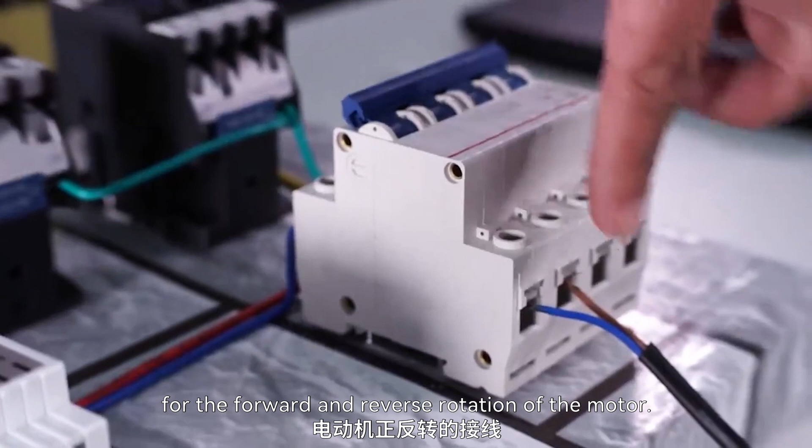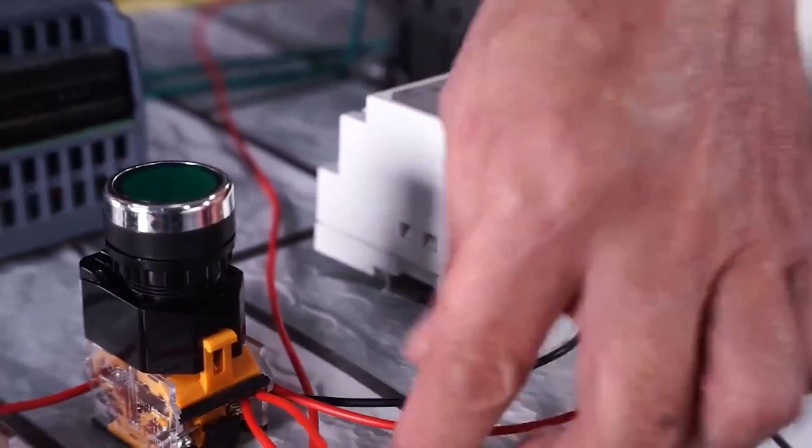Let's now examine the wiring for the forward and reverse rotation of the motor. We have a 220 volts power supply that outputs 24 volts positive and negative power sources. We start by connecting the positive power supply to the PLC's L+ terminal and the negative to the PLC's M terminal.

Then, we connect the positive and negative power supplies to the PLC's 4L+ and 4M terminals to serve as the load power supply.

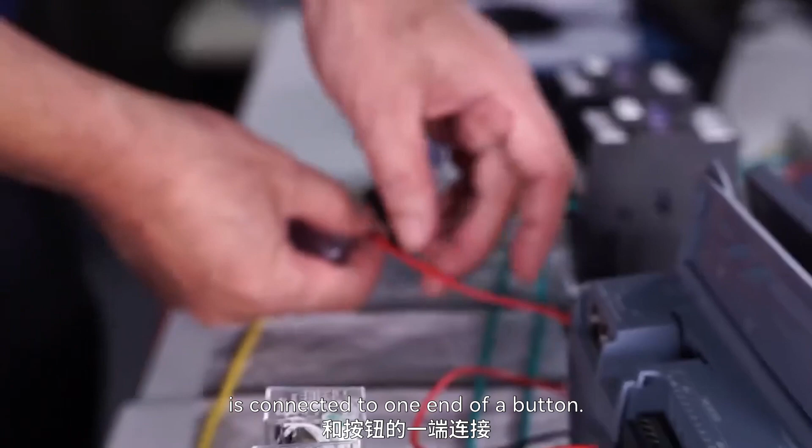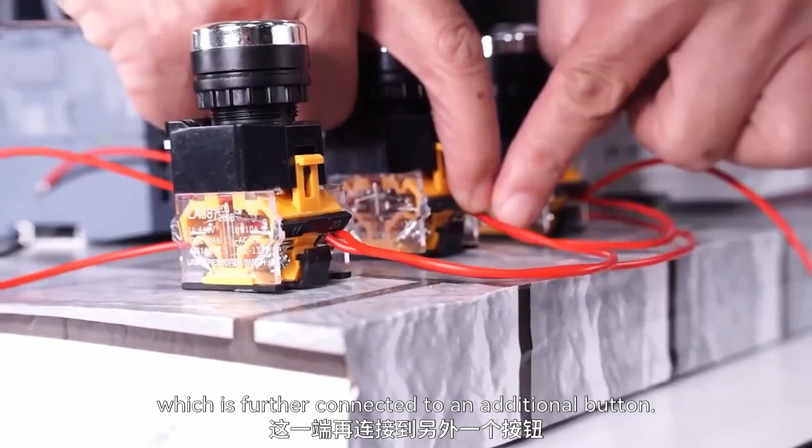One end of the thermal relay's contact is connected to one end of a button. The button is connected to another button, which is further connected to an additional button. The common terminals of these three buttons are connected to the L+ terminal of the PLC.

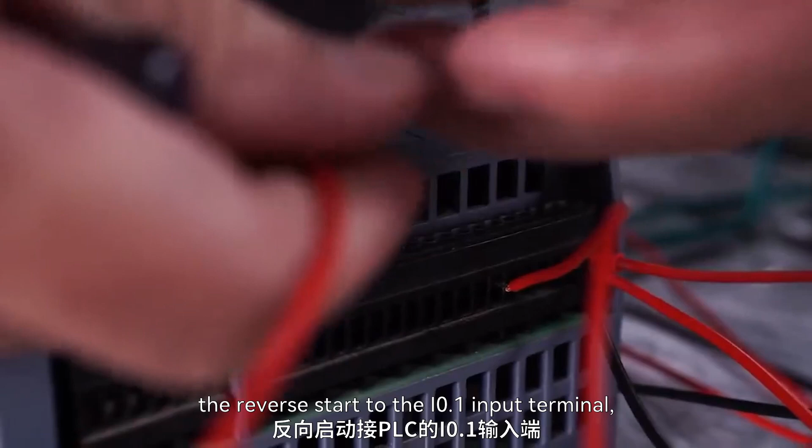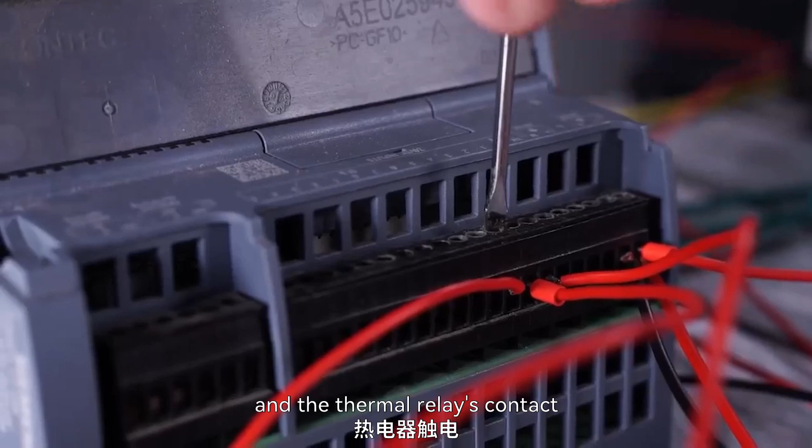The first button, for forward start, is connected to the I0.0 input terminal of the PLC. The reverse start to the I0.1 input terminal. The stop button to the I0.2 input terminal. And the thermal relay's contact to the I0.3 input terminal.

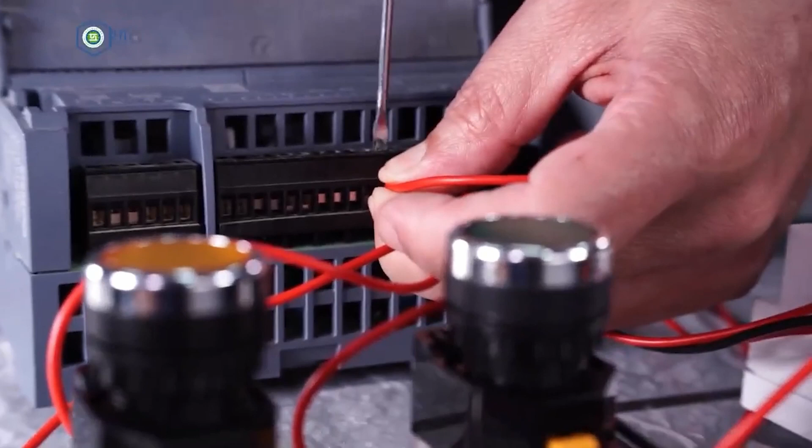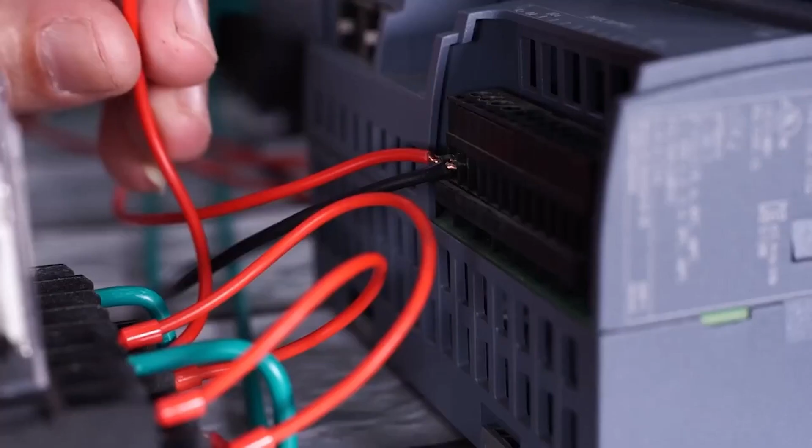The common terminal 1M of the PLC's input is then connected to the M terminal of the power supply to complete the input signal circuit. The PLC's output terminal Q0.0 is connected to the 13th terminal of the contactor KA1, and the PLC's Q0.1 output terminal is connected to the 13th terminal of KA2.

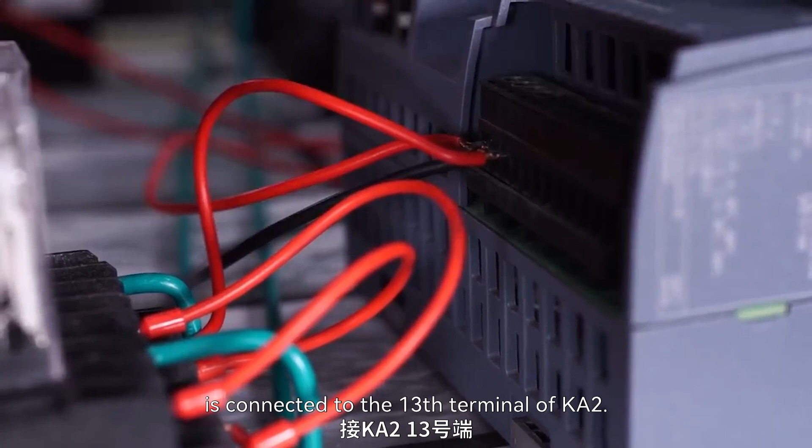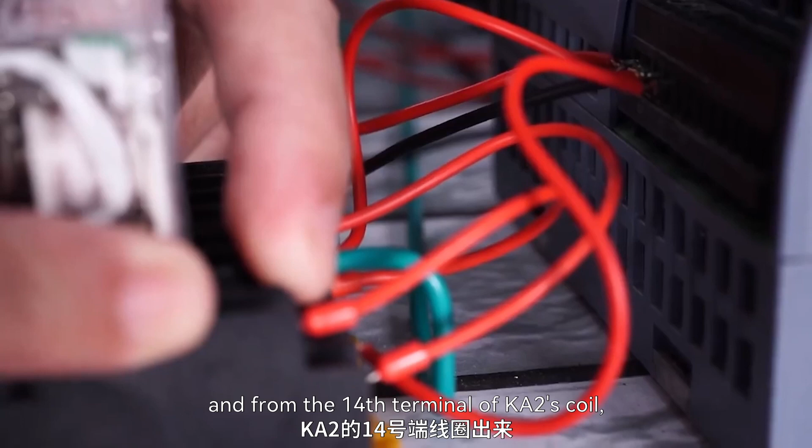From the 14th terminal of KA1's coil, it connects to the normally closed contact of KA2, and from the 14th terminal of KA2's coil, it connects to the normally closed contact of KA1. The normally closed contacts of KA1 and KA2 are linked together and return to the negative power supply 4N.

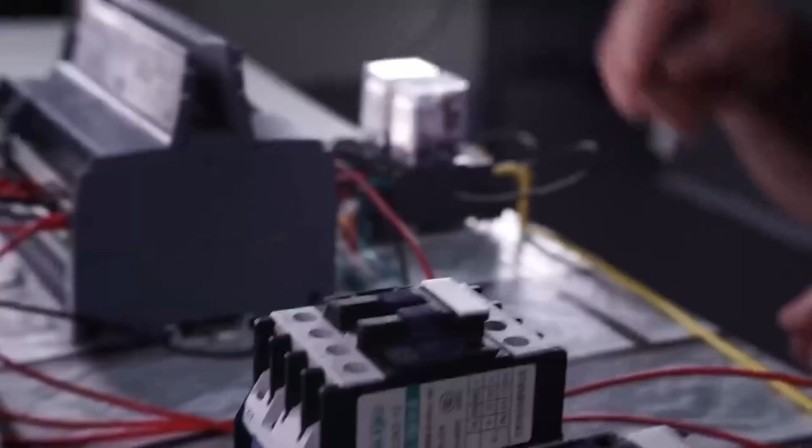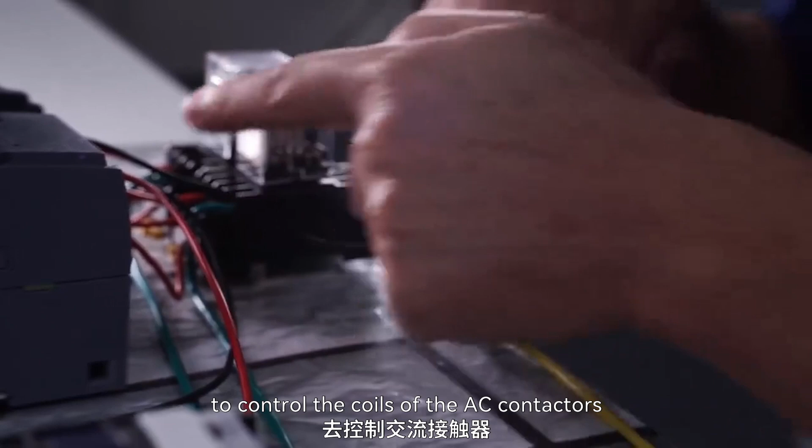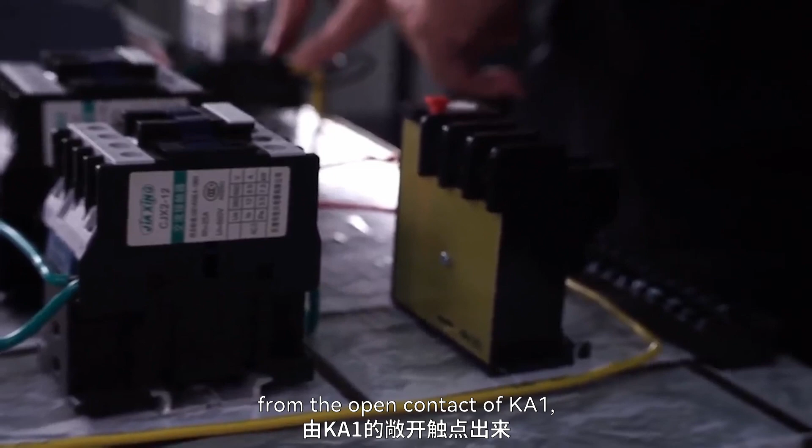Since the controlled DC devices KA1 and KA2 cannot directly control the motor, we use the open contacts of KA1 and KA2 to control the coils of the AC contactors KM1 and KM2. The 380V power supply comes to our two linked contacts. From the open contact of KA1, it connects to one end of KM1's coil, and from the open contact of KA2, it connects to one end of KM2's coil. The other ends of KM1 and KM2 return to the power supply.

Open the TIA Portal software and create a new project titled Motor Forward and Reverse Control. Here, you can select the location to store this project. We are currently placing it on the desktop. Click OK. And then click Create.

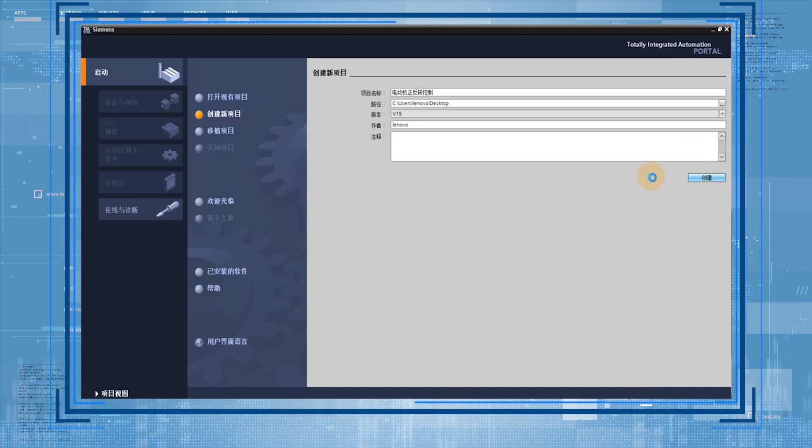After creating the project, we open the project view, and then in the project tree, select Add New Device. The device name can be set or left as default, typically PLC1. We select the controller, choose S7-1200. Select its CPU. Choose the 1215 DC CPU, and then select its version, with the bracketed version being 4.1. Click OK. A PLC is now displayed, and we can add it to our project.

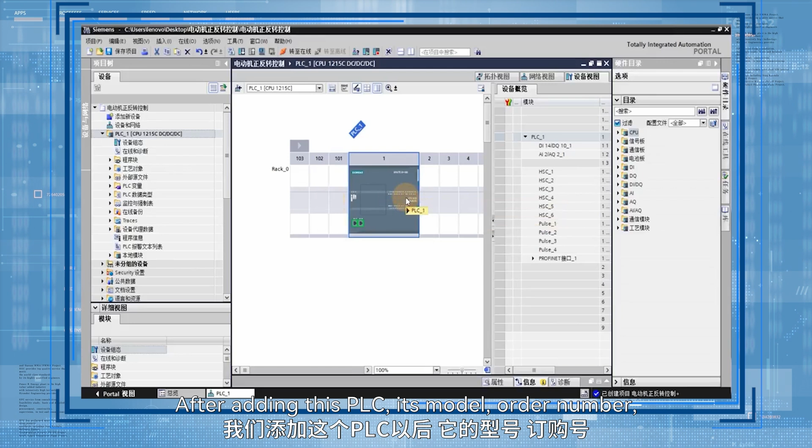Caution: after adding this PLC, its model, order number, and version number must match exactly with the actual PLC used. Any inconsistency will prevent the established control project from being downloaded to the PLC. After adding the PLC device, a device view window appears.

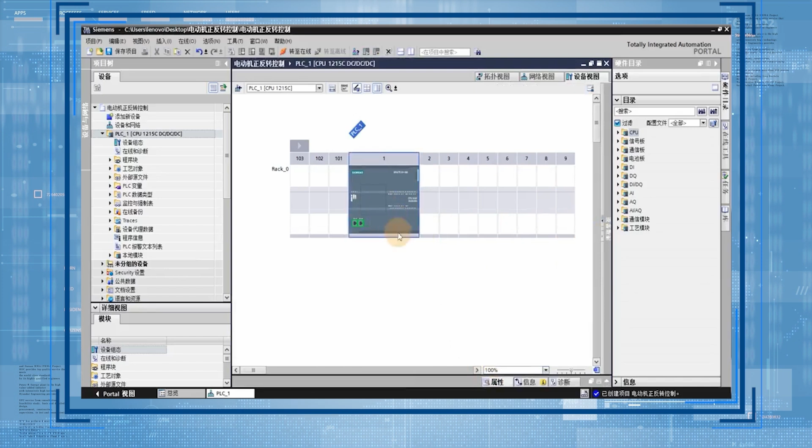Select the PLC, click on its properties. General. Here, you can retract properties. In this section, we can find the Ethernet address, and this IP address must be set correctly. The first 3 digits, 192.168.0, must correspond to the IP address inside the computer, and the last digit can be set arbitrarily. If the first 3 digits do not correspond to the computer's IP address, the project also cannot be downloaded.

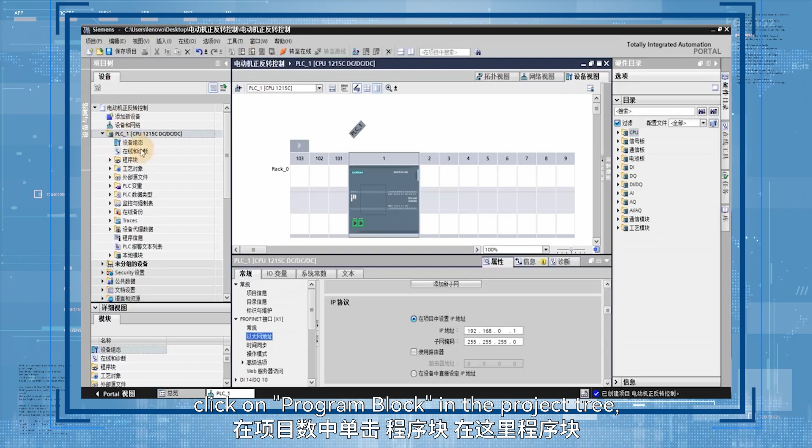For PLC programming, click on Program blocks in the project tree, and then open the main program OB1 by double-clicking.

This brings up our program editing box. We input the originally designed program. Click here with the mouse, input the forward slash.

Stop overload. Interlock coil, and then move the mouse here. Click the right arrow, and then input open contacts, self-locking contacts, and point upwards.

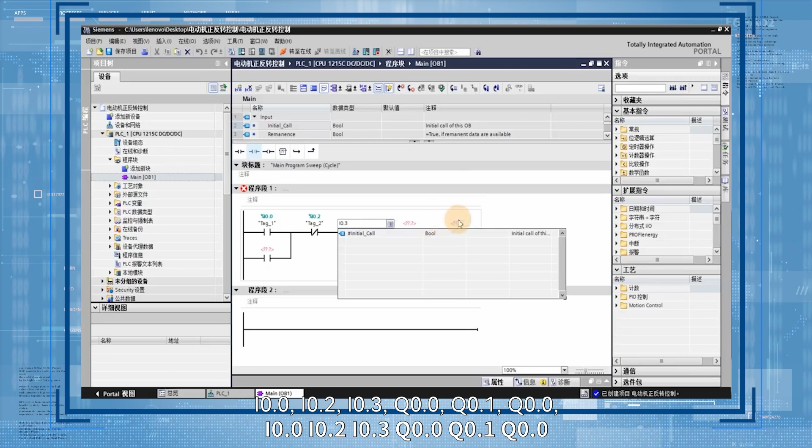Here, the corresponding contacts input their addresses: I0.0, I0.2, I0.3, Q0.0, Q0.1, Q0.0.

Appearing above is I0.0 corresponding, below is variable 1. One is the absolute address, and the other is the variable name. We can modify the absolute address here, display method, and symbol display method.

We can use copy and paste to copy the start/stop program, then paste it into program segment 2, and then modify the input.

Change I0.0 to I0.1. The stop button I0.2 does not need to be changed. Overload I0.3 does not need to be changed. The reverse output uses Q0.1.

Self-locking contact Q0.1. Interlock contact, this Q0.1 is changed to Q0.0. Then the reverse control program is also designed.

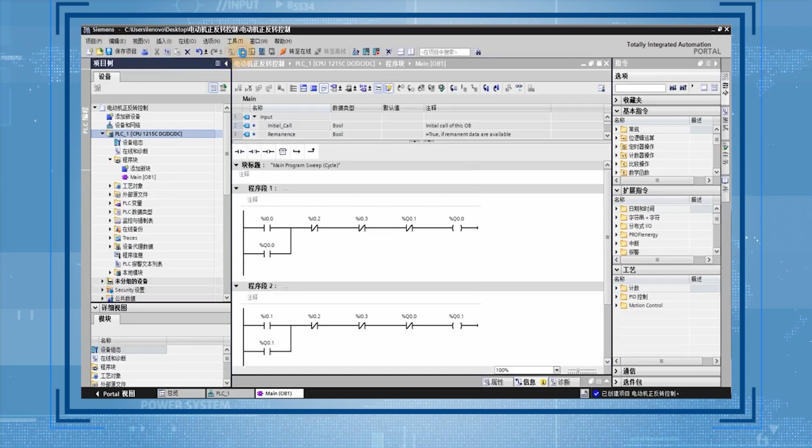In the extended download device box, there is a choice of interface here. We choose the Ethernet interface, and then select this network card, and then start to search. Search for our corresponding PLC, and click download.

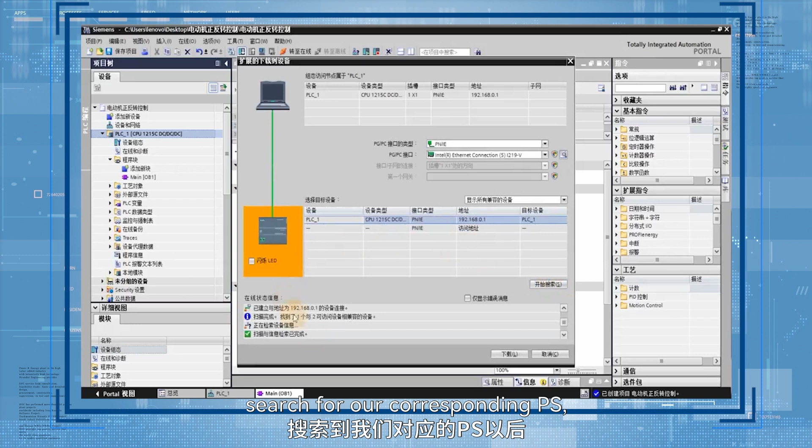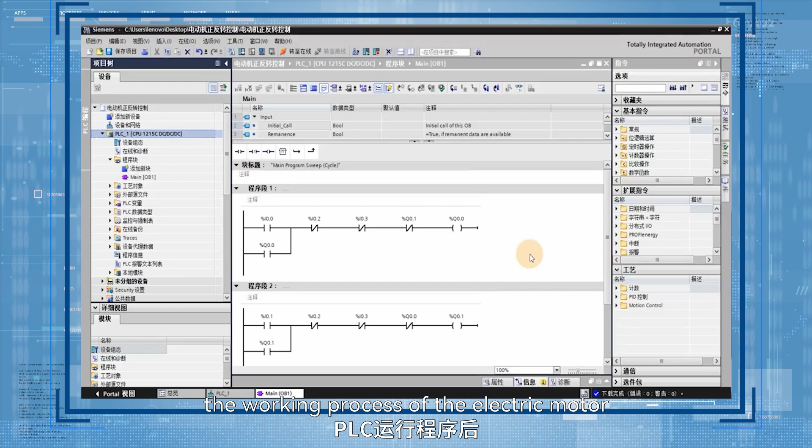After completing, we start to debug the program, operate the corresponding control buttons. We can see the working process of the electric motor after the PLC runs the program. This is a program written with general instructions.

We can delete the entire program and then use the second method to write the program. Use the set instruction to write our electric motor forward and reverse control program start. Use open contacts. There is no reset instruction here.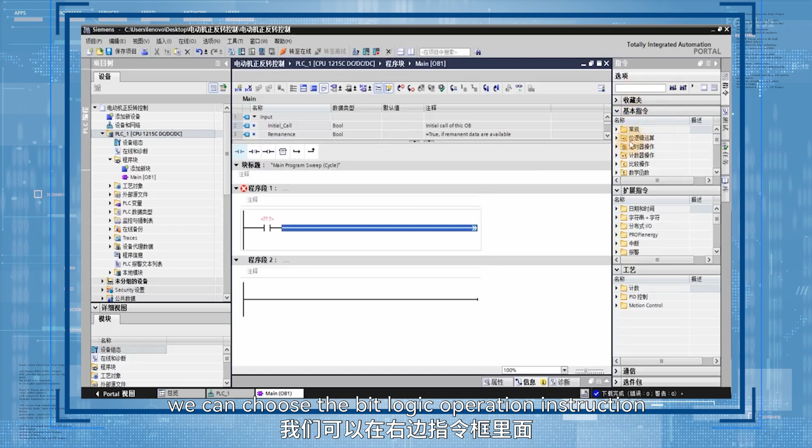We can choose the bit logic operation instruction in the right instruction box. Choose the reset instruction, and then click and then choose the set instruction. This is the forward start I0.0.

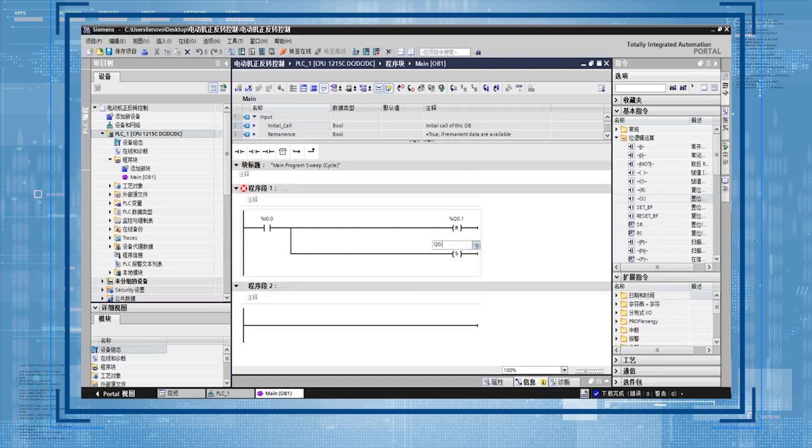This is reset Q0.1. Set Q0.0, which resets the reverse to 0 to stop, and then lets the forward Q0.0 set. To start forward, this is the forward start.

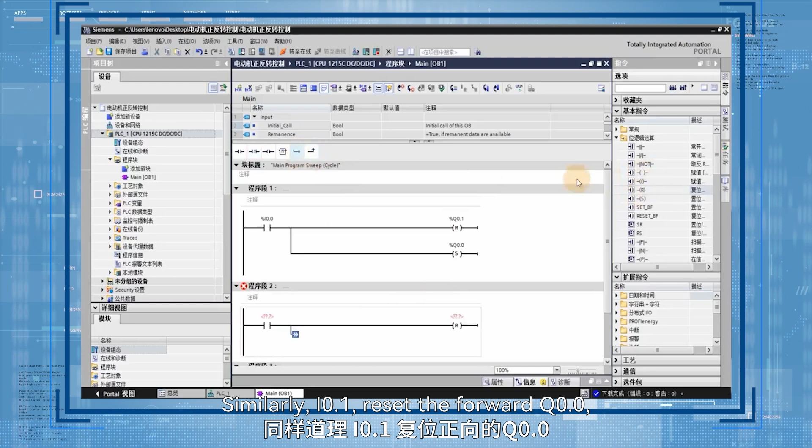Similarly, I0.1 resets the forward Q0.0, starts the reverse Q0.1. This is a forward start process, and this is a reverse start process. And then stop and overload.

Stop. We use reset. Add an overload here.

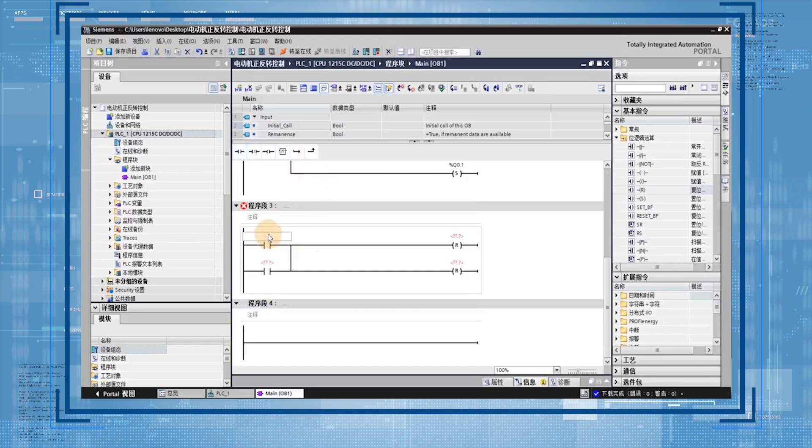Stop is I0.2. Overload is I0.3. Q0.0. Q0.1.

This section of the program mainly is: when stop and overload occur, reset the forward or reverse at the same time, stop.

After writing the program, we can download it to the PLC again. Click download. It asks if we want to overwrite the original program. Choose yes.

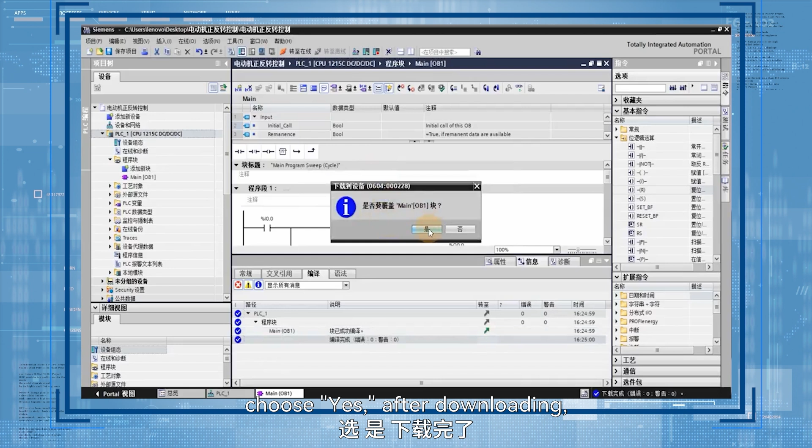After downloading, we can directly operate the PLC. Then it runs according to the new control program.

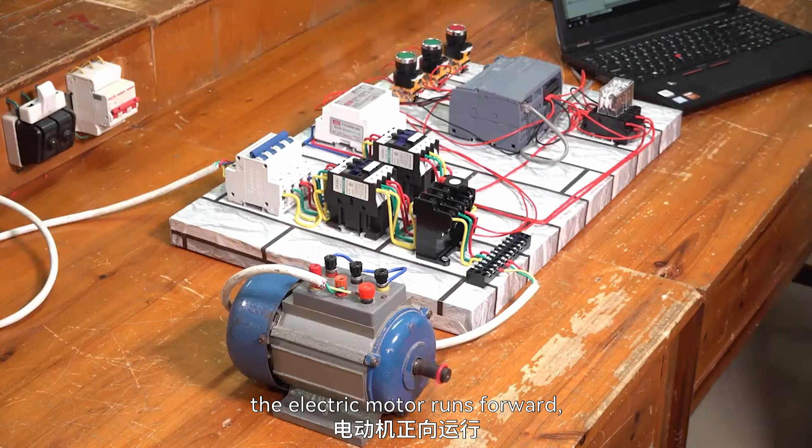Debugging the program, now we press the electric motor forward start button, the electric motor runs forward. We press the stop button, the electric motor stops. We press the electric motor reverse start button again, the electric motor runs in reverse. Press the stop button again, the electric motor stops.

Now we press the forward start button again, the electric motor runs forward. During operation, if the electric motor overloads, we now simulate the overload phenomenon, the electric motor will stop. This concludes today's lesson.